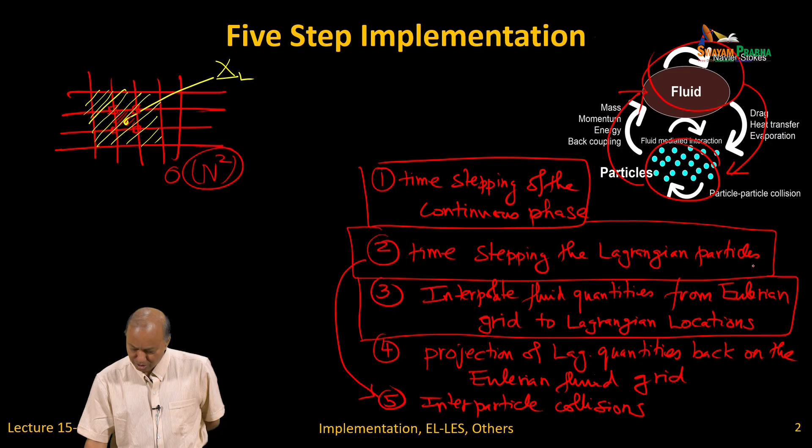Then the two have to talk, so you have to decide on your interpolation scheme—think about this carefully. If you're using a first order finite volume method, you must do a linear interpolation, staying consistent with your underlying numerical scheme. There's no point trying a spectral interpolation when your flow itself is only first order accurate. But if you use a third order space scheme, you really have to do a third order interpolation to get the velocity correctly.

Doing more is no good, doing less will be harmful. So that's a very simple recommendation.

And for the projection, you have two options. You could use Gaussian—the idea of a Gaussian is not purely numerical, since even the governing equation is obtained by a Gaussian filter or whatever filter you use. Or you could do first order projection, second order projection, third order projection, whatever you prefer.

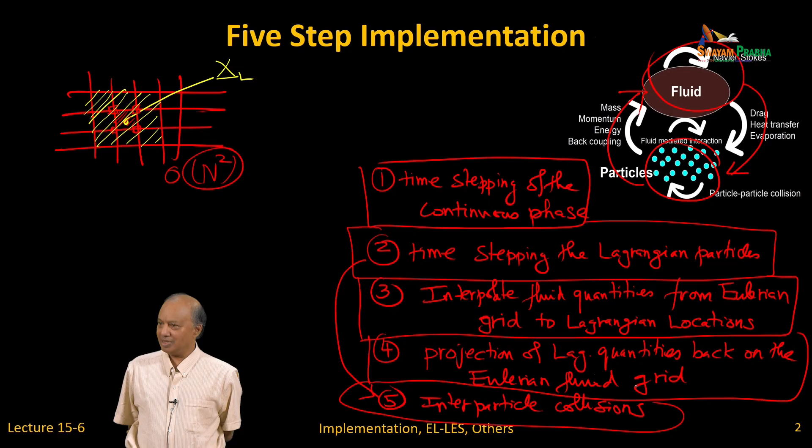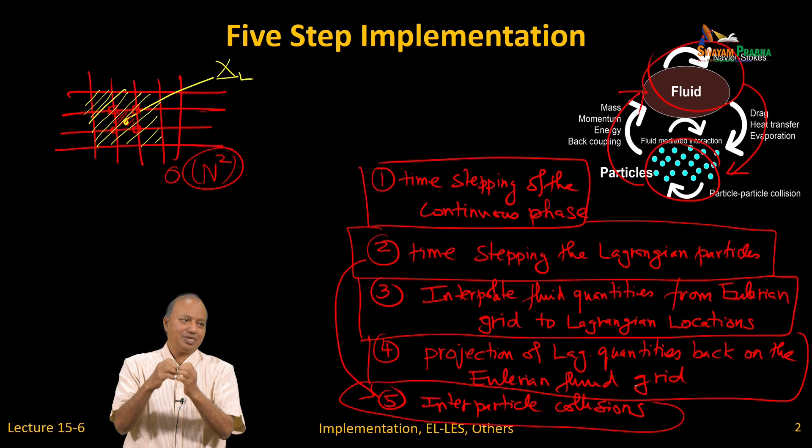The last point we talked about is interparticle interactions, i.e. collisions. If you have micelles or other complicated things like electrostatic forces, they come into play here—you have to include them when time stepping the Lagrangian particle. Sometimes there are cohesive forces, like van der Waals forces, that you will have to bring in. So any additional physics must be added to this basic package. These are the five steps that you will follow.

Now I also want to go over all the things that appeared in the glorious equation we wrote, on the right hand side. Various modeling decisions need to be made. Is there evaporation? If not, you can ignore the m dot term. So you want to sit down and think about what you need to model. Once you know what's needed, go through the literature and find the best model available in your regime of interest, and use it. You have the code, you have the closure models - put them together and you have a good Euler-Lagrange simulation. That completes Euler-Lagrange simulation.

I want to go another 20 minutes max for Euler-Euler, just like I did with Euler-Lagrange.

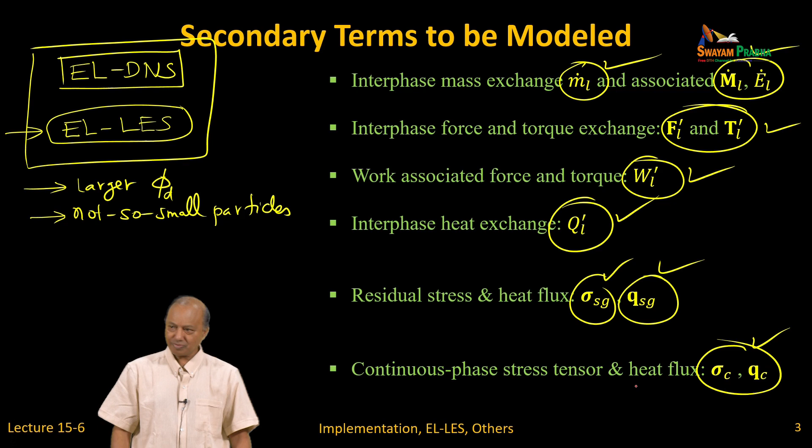The basic idea is that, whether you explicitly state it or not, you filter both phases. Once you write the Euler-Euler equation, there is filtering involved, and that filter size is about 2 to 3 times your grid size. Both phases are in the Eulerian frame.

Definitely you want your particles to be much smaller than your grid size, and there should be plenty of them. Euler makes no sense if you have just one particle here and a particle there. It really doesn't make sense, but most of us don't use it like that. We use Euler for fluidized beds, or most applications where there are a lot of particles, and the fact that you can't track every one of them is the reason we do that.

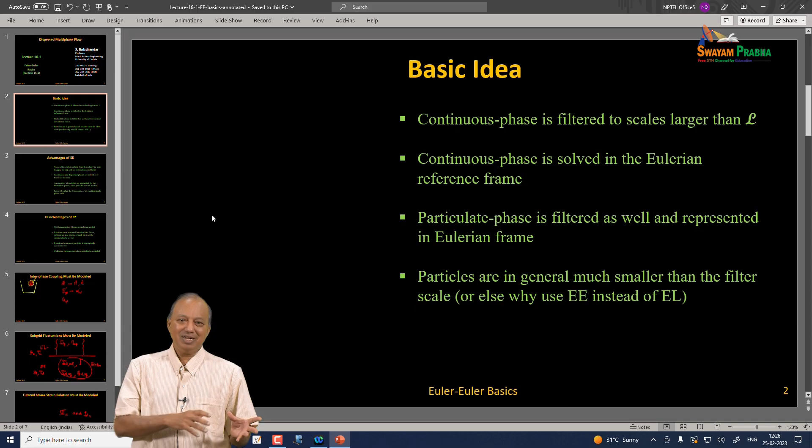Now there is also another Euler-Lagrange method where you only track every 1 in 1,000. So if you have a billion particles, you could do a million-particle Euler-Lagrange simulation. Remember, you're tracking, but you're doing averaging, because that one particle you track is representative of 1,000. So there is averaging even in the Euler-Lagrange scheme, it just makes it harder. It's a bit like a compromise between solving a billion particles, which is very expensive, versus fully averaging and using Euler.

So the advantages here are the same as before: you don't need to resolve the boundary between fluid and particles, no penetration issues, etc. Same as Euler-Lagrange. Both phases - that's why sometimes they call it the interpenetrating two-fluid approach. You treat both as fluids, they are all over, interpenetrating. The other thing is there's no interpolation, no projection - none of those issues are there anymore, because both are in the Eulerian frame.

The other thing is there's no need to do collision detection, but you have to model the collision, and that's sometimes very hard. Especially we had a tough time when a shock was going over a bed of particles. We tried to do Euler simulation for dense particles, and it was very difficult - it would push the volume fraction to 80%, 90%, impossible volume fractions, because it didn't understand. But in Euler-Lagrange, it will never happen because the DEM will push particles literally. So there is an advantage there.

But when volume fraction is modest and your flow is not shock-driven, you can come up with collision models that reasonably take care of everything. And it fits very well with existing single-phase code. That's a nice thing, because if you have code to handle fluid mass, momentum and energy, you just copy and paste and create another set of routines that take care of particulate phase mass, momentum and energy.

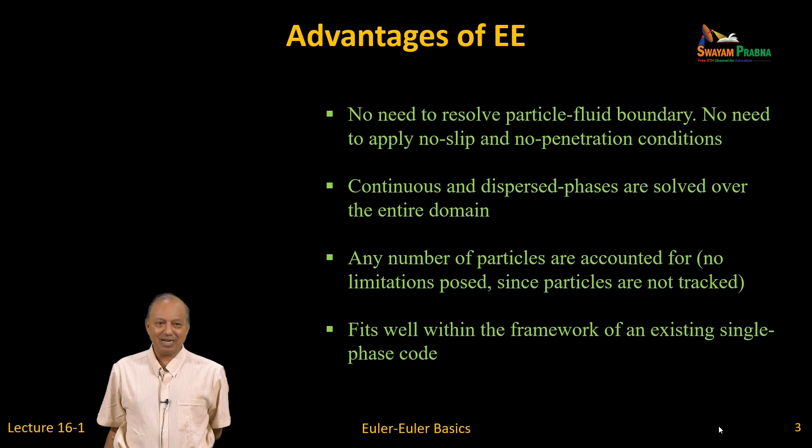You couple them. The only thing is, the biggest disadvantage we'll see is that not only are closure models needed, but multiple bins are needed. In Lagrangian, you can take care of each particle and track its own size. Here, when you write mass, momentum and energy equations, you've got to specify the size. There are techniques that look at the average size, etc., but it's not that easy - in fact, they make the models even harder.

So the best approach, I'd say, is that you have to bin them: very small particles, intermediate size particles - you have to model them separately, because very small particles don't get spun out of vortices, while intermediate size particles may spin out of vortices.

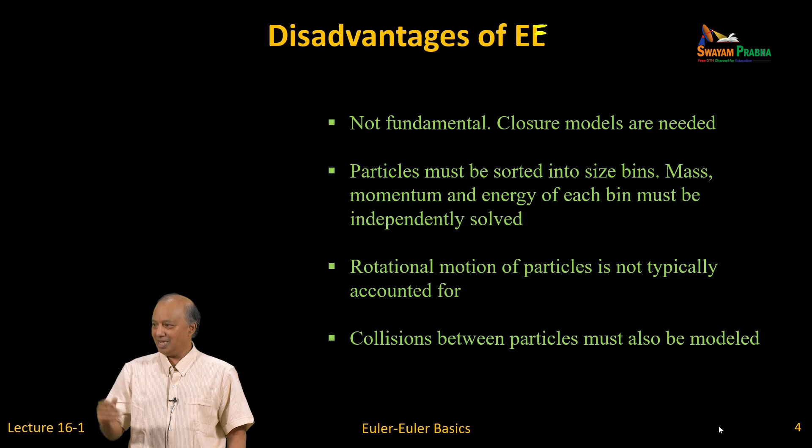You will have to treat them Lagrangian, because as I said, they get ejected and crossing trajectories and all sorts of stuff happen. But when they burn, they produce fine aluminum oxide smoke - that's what you see coming off the exhaust of a rocket. They are really small, micron or submicron sized, so there's no reason to track them. So one approach is mixed computing: your gas phase Euler equations, your smoke as an Eulerian representation, but the aluminum droplets treated in a Lagrangian way. You can combine them to your advantage.

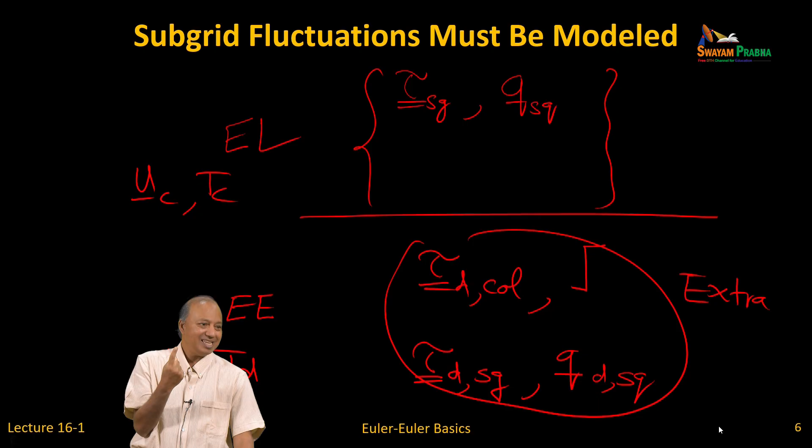The interphase coupling must be modeled. I've said the same three things I talked about previously: interphase coupling, mass, momentum, energy transfer, heat transfer, etc. must be modeled, and subgrid stresses. Now there are two kinds of subgrid stresses - fluid subgrid stresses, which take care of fluctuating fluid velocity, and subgrid particle stresses for the particles. Then the last thing is modified viscosity and modified conductivity, which you still have to do.

The reason I don't want to spend a whole lot of time is that there's nothing fundamentally different here, but we did talk a lot about this yesterday, or the day before. The drag models are perfect for Euler-Euler, because you only have average relative velocity, you only have average volume fraction, and what you need is only average drag.

So for an Euler-Lagrange scheme, to get drag on a particle, what do you do? You go and ask, what's that particle's velocity? You subtract it from the local fluid interpolated velocity, and that's your relative velocity. So you're not dealing with an average Reynolds number, you're dealing with that specific particle, and you calculate the volume fraction around that particle in the neighborhood. So we're not using the drag law the way it was supposed to be developed.

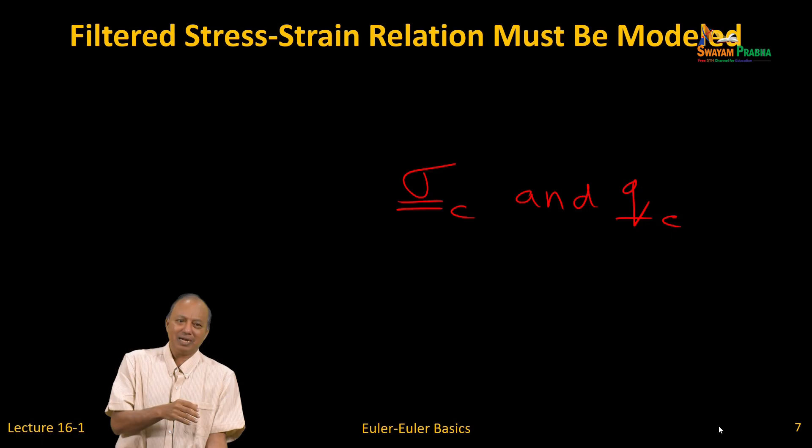Then you get the drag and apply it for that particle, not for everybody. So there's a little bit of a crime being done here, even though your intent is good - we say, I track particles, why don't I track them very well? What we need is better models that are good for Euler-Lagrange. They're being developed, so keep your eyes open, so they get better. People understand that limitation. So far the models are mainly for the Euler-Euler scheme, but models better suited for Euler-Lagrange schemes are in development. This is the highlight I want to give.

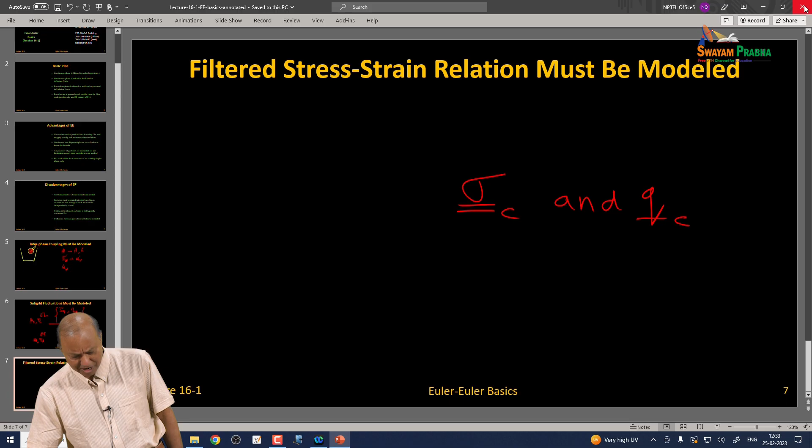I want to spend another maybe 5 minutes or so. I will show one more set of governing equations, what they are. You will see that these are very similar to Euler-Lagrange - really, the gas phase equations are the same. The only thing is that you remember in Euler-Lagrange, there are feedback terms.

Each particle requires a Gaussian spreading, etc. None of those things are needed here - you don't have individual particles. So for all the feedback, you just have to ask: what's the cell average fluid velocity? What's the cell average particle velocity? That gives you the cell average relative velocity. What's the cell average particle volume fraction?

Put in Richardson-Zaki and you say cell average drag, or Gidaspow relation, whatever your favorite. In other words, lots of things become easier here.

So you have a Euler-Lagrange equation, the Euler equation. That's the difference I'm trying to highlight here. You take each particle, its evaporation rate, you have to spread it with a Gaussian. Here, you have to now come up with a model for cell average evaporation rate, not individual particle evaporation rate. You have to do a cell average. It's very hard because that evaporation rate depends on droplet size.

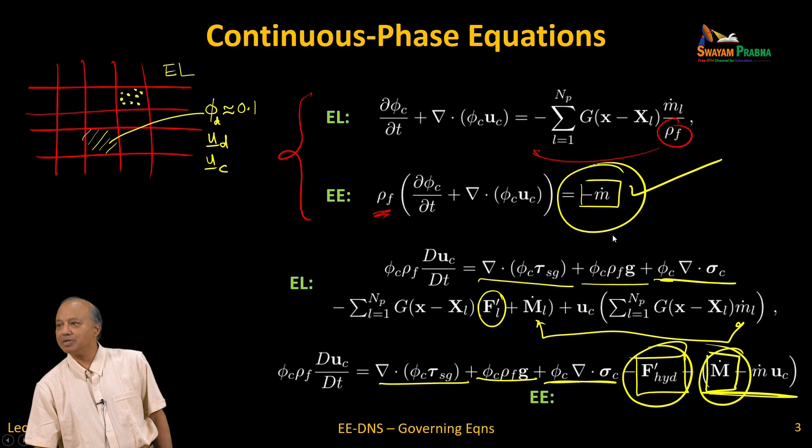The other thing that becomes important is when you look at the dispersed phase. So all the previous slides, what happened? I was comparing Euler-Lagrange mass balance, Euler-Euler mass balance equation, Euler-Lagrange momentum equation, Euler-Euler momentum equation. I will share you all the annotated slides, you can look at the details, and you can see what the difference is.

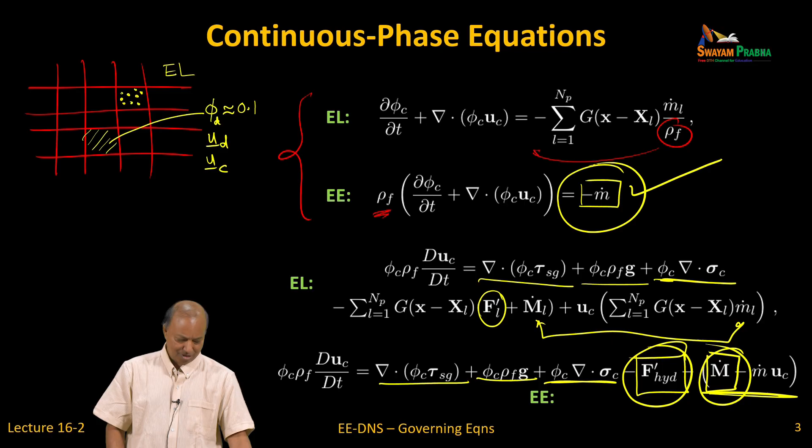And here everything again, gas phase. What would be the gas phase equation when you're tracking particles, versus when you have a two fluid approach? Again, these are all glorious equations, everything in it. Again, I want to emphasize that typically you want to simplify them.

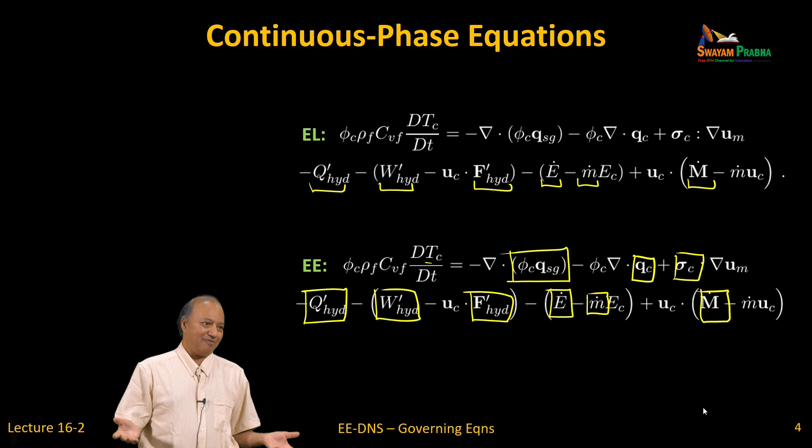So now you have Euler equations, field equations for the particulate field. This is how we used to track particles. Now we have to solve this equation. So we tracked velocity. Here, the important thing is that you have to add collisional effects. There you detected collision and took care of it, so you have to add terms that will account for that.

Imagine that example that I talked about: there was a channel, I seed particles everywhere and let the turbulent flow go. It's periodic, so they keep coming back. Run them, all the particles will go towards the wall, and then I said you have to put collision to make them move.

Now if you are solving this Euler-Euler, you have to do the same thing, but now you cannot detect collision anymore. You have to create a collisional pressure. Wherever there is more particle, you have to somehow calculate the pressure to be large there and low where particles aren't. So particles will be pushed from high density, high concentration regions to low concentration regions. You have to do that. In other words, you have to come up with collisional models. I have some discussions of that in the book.

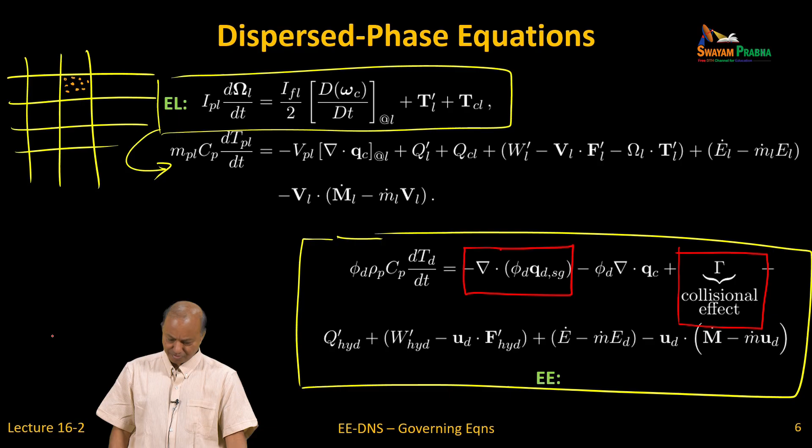So the main point is that there is a lot of modeling involved. That's my slide. Let's see if I want to talk anything more, and if not, that will be the end of this.

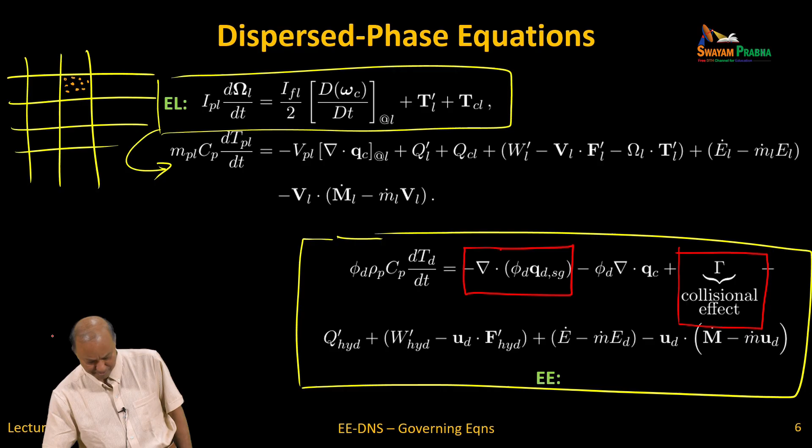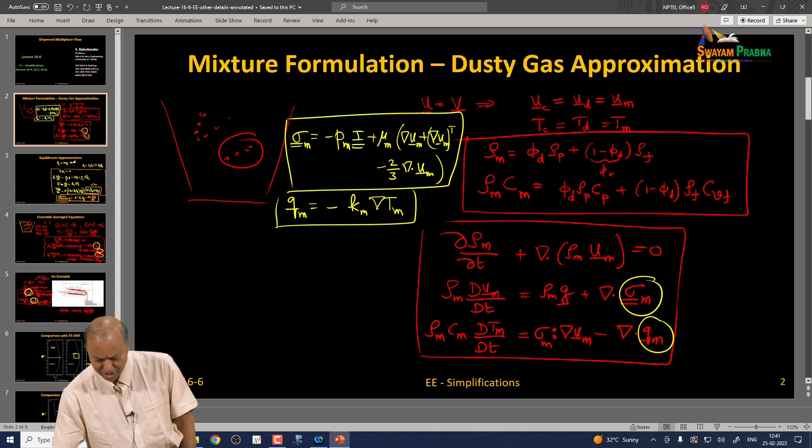There's a lot of details on the closure models of these various terms. This is sort of like a formulation from the last set of lectures. So sometimes what people do, I just want to give you other things people do.

They do what is called a mixture model. If there are two fluids, why don't we just deal with them in a combined fashion? This is especially for very fine particles. This makes a lot of sense, because then you define the velocities are the same - it's a mixture velocity. Velocity of the particle and the fluid are the same. That's the mixture. Then you can have a very simple set of equations: mass balance, momentum balance, energy balance of the mixture. Very simple.

That's one formulation. It's also Euler-Euler in a way, because the good news is you don't have to worry about differences in sizes, etc., because all of them are moving the same. They are so small that it doesn't matter whether it's nanometer, 10 nanometers, or 100 nanometers, as long as they move together. Like I said, you have to treat different sizes when the Stokes number is around 1. Very small ones all follow, very large ones go their own way. It's just the intermediate guys that are troublemakers.

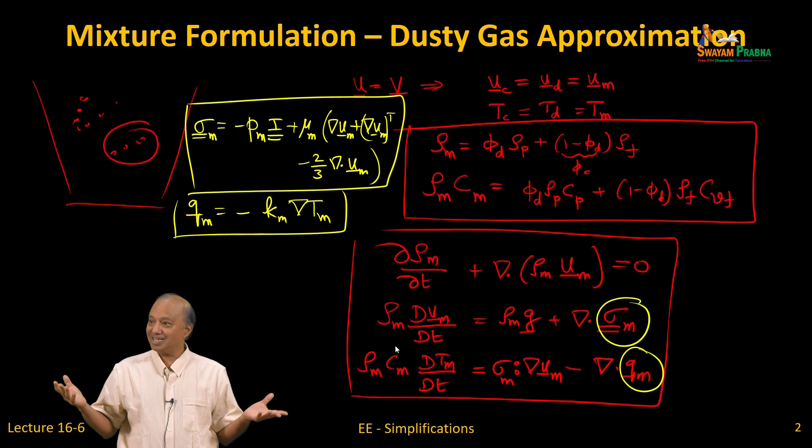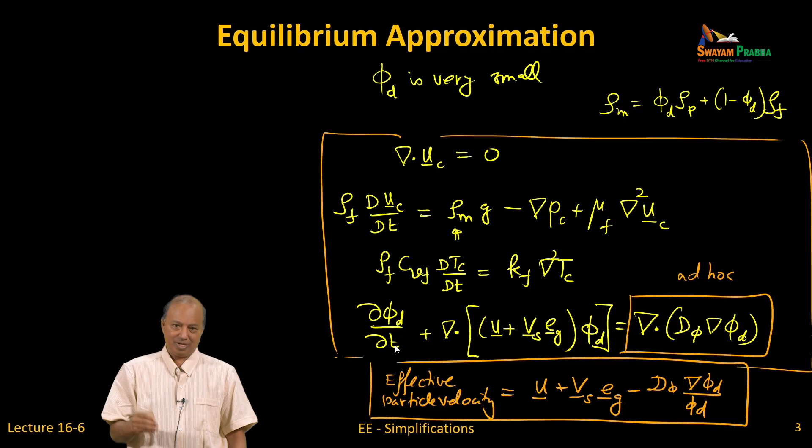So this equation is extremely simple. This is a simplification in the Euler domain. The mixture formulation is saying velocity is exactly the same. Here we are saying you don't even have to solve the number density of the second particle, because everything is mixed - you just have to solve one set of mass, momentum and energy equations. But here we are going one step more complicated: we don't have to solve every particle size's momentum and energy, because their velocities are freely available. You only have to solve their concentration equations. So it's a little bit easier.

The other thing, in RANS approach, this is the kind of thing - ensemble average. I didn't talk about it, I have a section on it in the book, you can take a look at it. You again have to have particle phase ensemble average equations, gas phase or fluid phase ensemble average equations - same sort of modeling issues involved.

Okay, so I want to stop there because I want to spend some time talking about a little application that I have done in my group. We'll do that this afternoon.